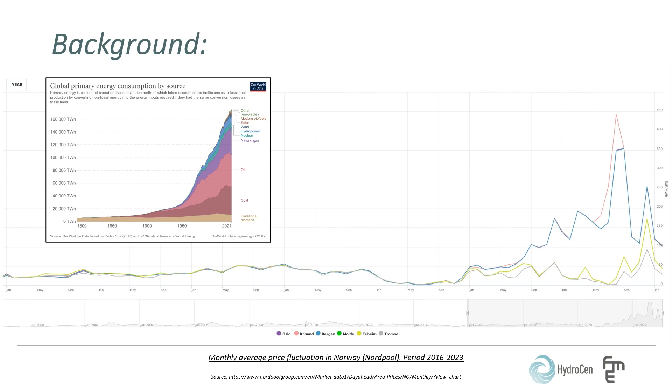While the price demands fluctuate, the production of hydropower plants can fluctuate too. As we can see in the picture in the top left corner, energy consumption has exponentially increased since the 1960s. In the main picture below, we see the variation and fluctuation of the price of energy, especially during the energy crisis of the last year. This has resulted in an increase of operation time in so-called off-design conditions, meaning conditions in which the flow regime is not optimal for the design characteristics of the hydropower runner.

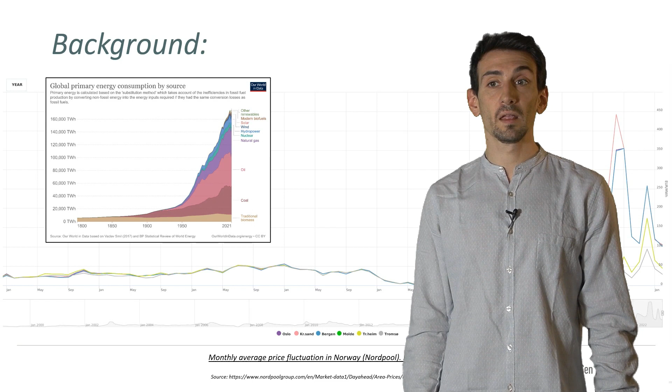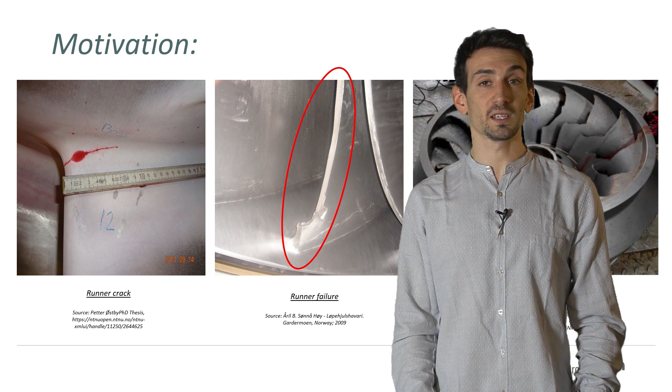So in a reaction turbine such as a Francis, this, together with the further development of runner design, which has led to more efficient, cheaper and thinner runner blades, has resulted in an increased vulnerability to phenomena happening in off-design conditions, resulting in an increase of runner cracks or failures due to mutual interaction between fluids and structures. As we can see in the pictures, from the left we have three types of failures. We have a small failure, just runner cracks, on the utmost left. We have a big piece of turbine missing in the middle one, while we have a catastrophic failure of the entire runner on the utmost right.

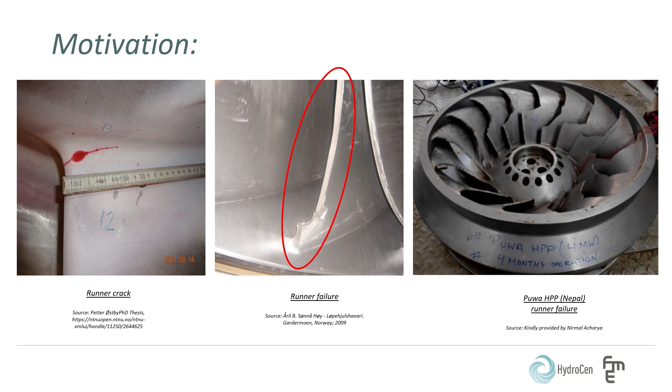But one of the main phenomena causing runner failure is resonance, whose destructive power is already well known in civil engineering, and a famous example is the Tacoma Bridge. In a coupled system composed of a fluid and a structure, the movement of one of the two would be dampened by the other. But when the interaction of the two results in an oscillating force, if the frequency of the oscillations coincides with the resonance frequency of the structure, we will witness an uncontrolled amplification of the fluctuation, generally resulting in structural failure. This concept applies to hydropower runners too.

So runner designers always perform a resonance analysis in order to check that the runner they've designed will not experience resonance conditions for the flow for which it is designed. But when the flow condition changes to a so-called part load regime, maybe for the reasons from before, the runner could suffer a resonance regime, resulting in cracks or failures. By part load regime, we mean conditions in which the flow is lower than the one the turbine has been designed for. So determining if a runner will fall into a resonance regime for a specific flow is not trivial.

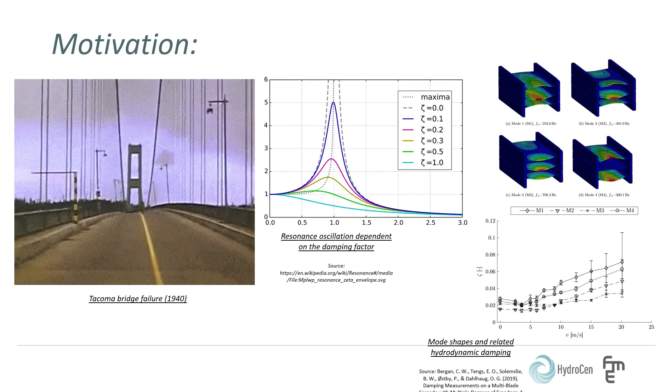The damping given by the water is dependent on its velocity, therefore flow dependent, and on the specific configuration of the runner system itself. Higher velocity generally gives higher damping. Therefore, especially when going from full load to part load, the runner can experience higher vibration than expected. This is due to the decrease of the flow and the related decrease of the hydrodynamic damping on the runner oscillation. But making a proper analysis on a real Francis runner is very complicated, as multiple phenomena happen at the same time, and it is not trivial to decouple the participation of the single phenomena.

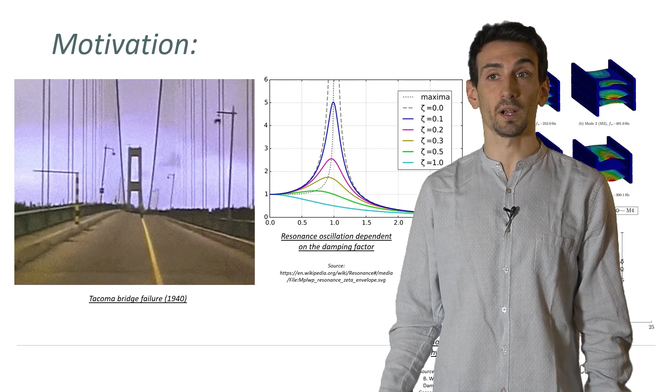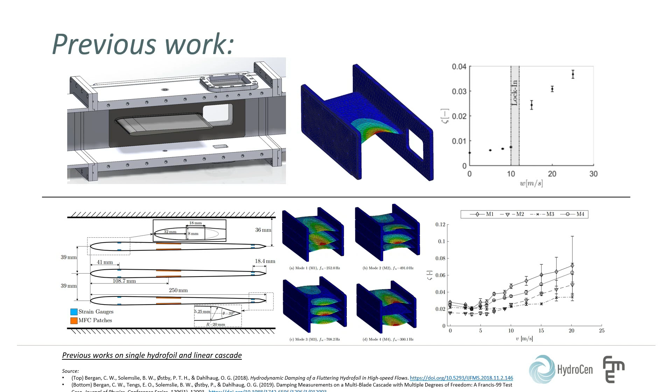Moreover, damping is dependent not only on the velocity, but also on the shape of the runner, and on the shape of the fluctuation itself, also called modes, as you can see in the top right picture. So a simplification of the system was necessary, and studies on hydrodynamic damping were made on single linear hydrofoils and linear cascades. These studies have shown the same trend for both configurations: before the lock-in region, which is defined as the region where the vortex shedding coincides with the natural frequency of the structure, the hydrodynamic damping is almost constant, while after the lock-in region, the hydrodynamic damping increases almost linearly with the flow velocity.

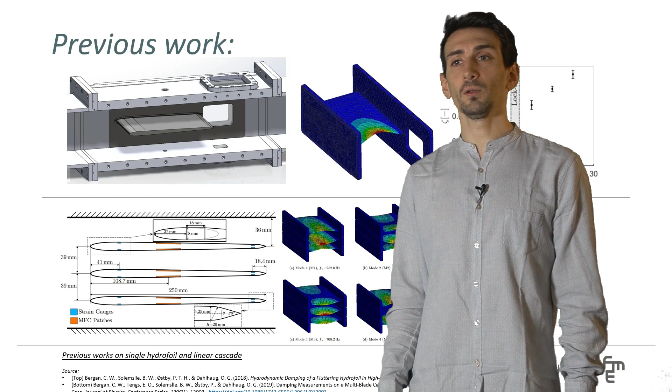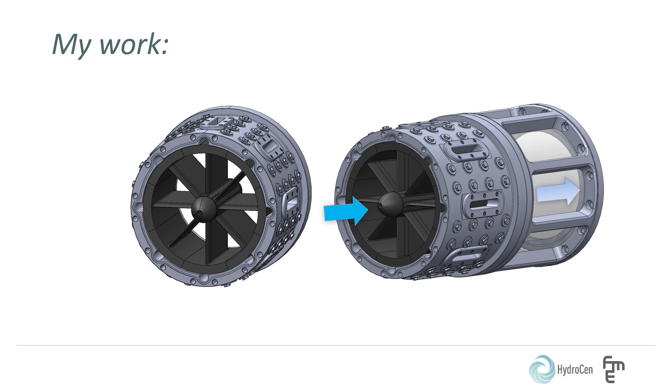So the question that followed was, what is the effect of neighboring structures on the damping? The goal of my PhD is to understand the damping behavior in a non-rotating radial configuration of hydrofoils as a further step toward understanding the damping behavior in a complex system such as a Francis turbine. To achieve the goal, we planned a detailed measurement of the prototype damping across different flow velocities for the main modes of vibration.

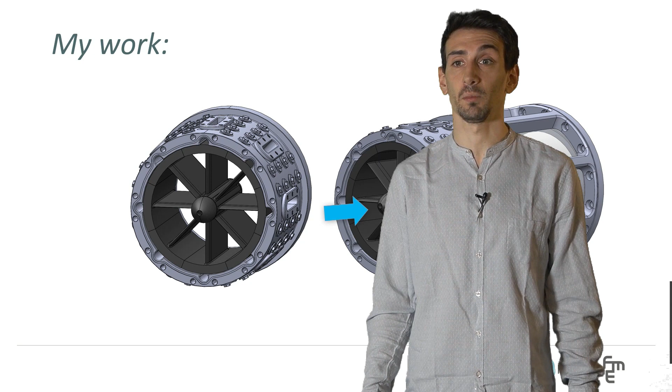The prototype has been equipped with strain gauges, pressure sensors and piezoelectric patches in order to control the excitation of the blades. Moreover, the prototype has been designed with optical access to allow flow measurements such as PIV and LDV. A second campaign of measurements will be done, including PIV analysis of the flow downstream of the cascade, and it will be used to validate the numerical simulation of the coupled system. On the right, you can see the prototype model in both CAD and the actual one in the hydropower lab, while on the left you can see how the sensors are mounted on the blade itself.

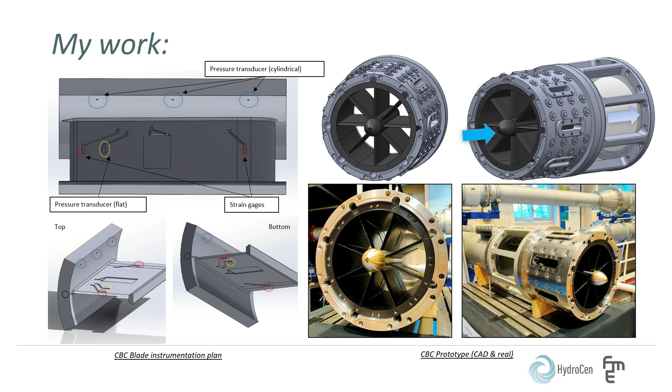The results obtained so far include PIV flow measurements of the wake flow downstream of a single hydrofoil, from which the damping results were already extracted in previous works, a modal analysis of the oscillation shapes in both air and water for the prototype I'm going to test for damping, and an instrumentation of the blade cascade that is now getting ready for the actual damping measurements.

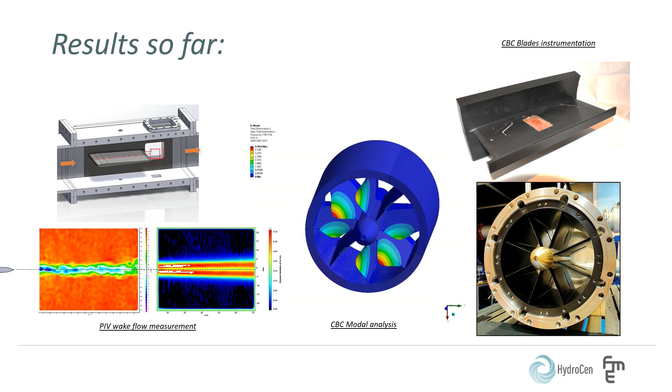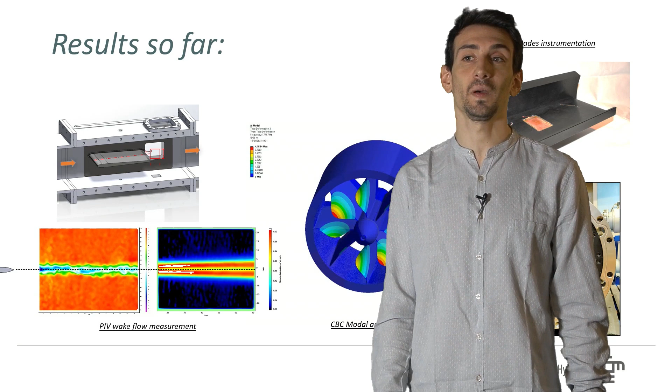So, in conclusion, a full understanding of hydrodynamic damping could potentially provide future runner designers the tools to design blades that are not affected by resonance problems, as the resonant peak could be smothered by the hydrodynamic damping action, avoiding expensive runner repairs and/or replacements.